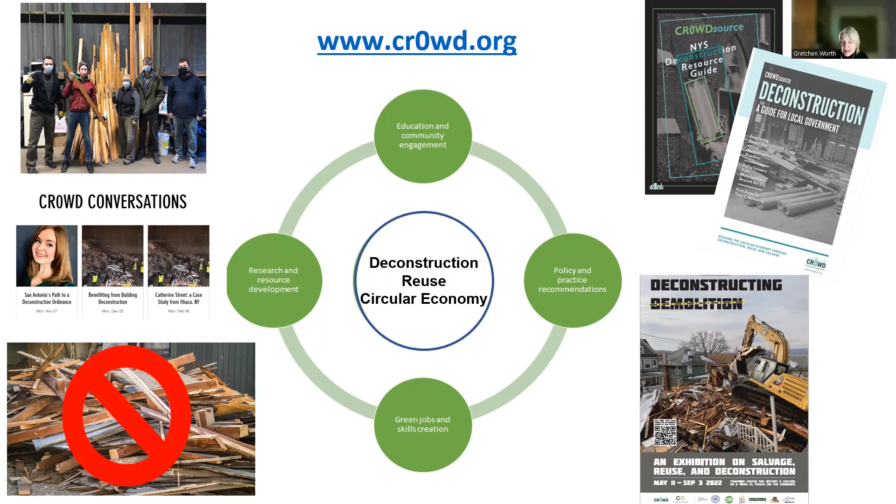Since we're coming to you tonight from Ithaca, New York, I'd like to acknowledge that Ithaca is on the traditional homelands of the Guyakahono, the Cayuga Nation. The Guyakahono are members of the Haudenosaunee Confederacy, an alliance of 6 sovereign nations with a historic and contemporary presence on the land. The Confederacy precedes the establishment of Ithaca, New York State, and the United States of America. We acknowledge the painful history of Guyakahono dispossession and honor the ongoing connection of Guyakahono people, past and present, to these lands and waters.

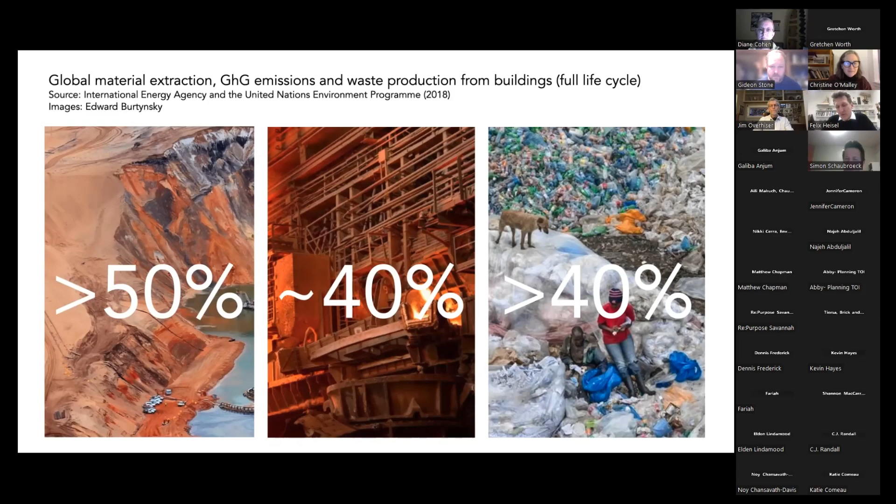If you look at the influence of building and construction over the whole life cycle of buildings, from the production all the way till the end of use, then our industry is responsible for more than 50% of resources that are taken out of the Earth's crust, roughly 40% of carbon dioxide emissions and more than 40% of solid waste that is being generated. And it's worth looking at especially the carbon emissions a little bit more in detail.

If we were to aim for the 1.5 degrees Celsius target that was agreed at the COP in Paris in 2015, I think, 2016, we would need to flip the curve that we've been running for the past 100 years, which is an exponential curve that goes up in terms of carbon emissions and had just started to slow down now. If we flip that and mirror it, then we have the target, which means a reduction in carbon emissions by 65% in the next, let's say, 7 years.

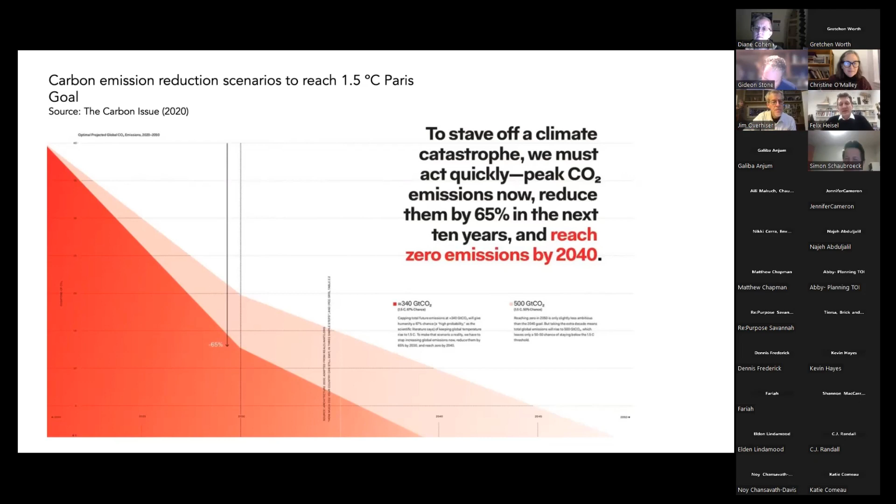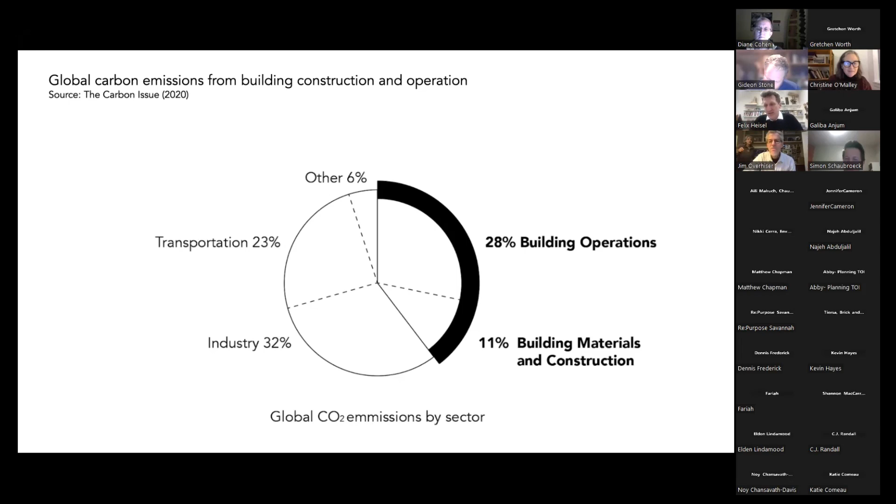6-7 years, which is an immense undertaking considering the size of our industry and the timelines associated with the construction of a building. So we really have our work cut out. But if you look at these numbers in more detail, part of it comes from the operation of buildings, all the energy to run a building, to heat a building, to run our computers, et cetera. And the other percentage, globally 11%, comes from the production of materials and the construction of these houses themselves.

But this isn't the whole story, because if we change the time scale and look at only the next 10 years, these numbers shift dramatically, because operational carbon emissions are emitted little by little, year after year, over the timeline of a whole building, which is 70 plus years, ideally 500. But if we only look at the next 7 years, the time it takes to reduce our emissions by 65%, then the embodied carbon emissions, which are emitted on day one of a building's opening, because they were produced in the production of that house, take on 74% or even more of that pie chart.

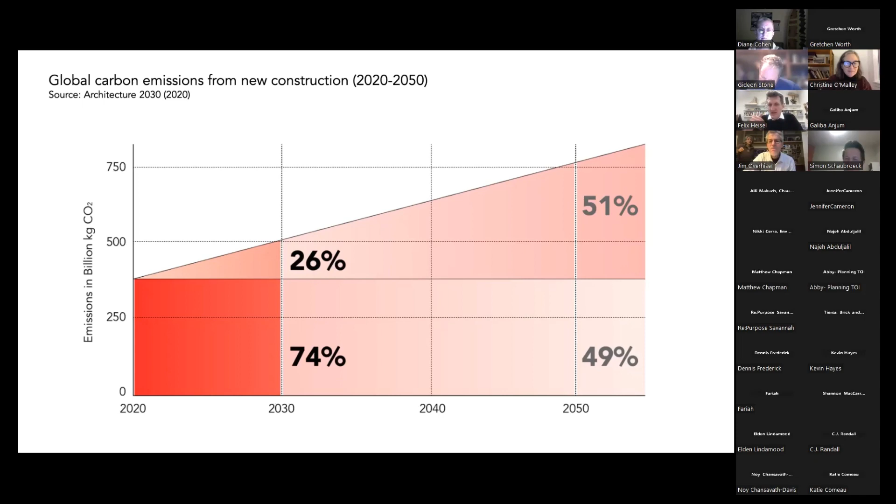And so if we want to make swift and rapid change, we need to change the way we build, and we need to change the way we source our materials, and reuse is the most sustainable way to do so.

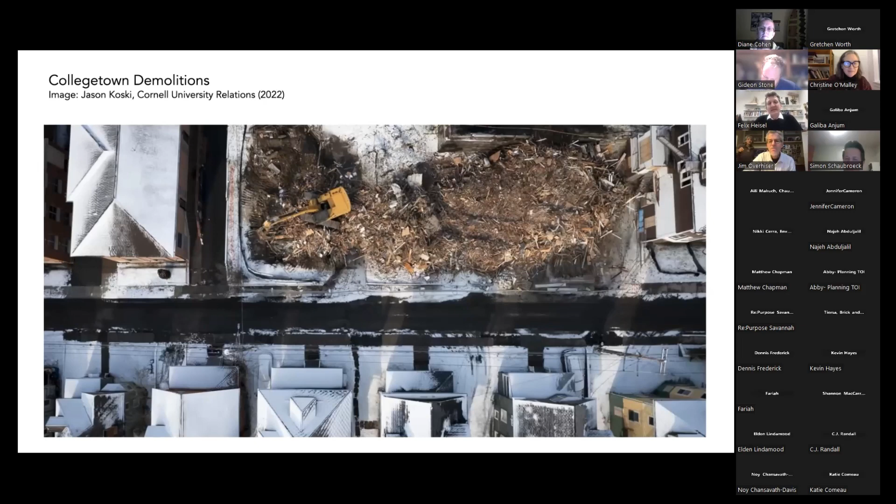And so within this framework, we looked locally at Ithaca, trying to understand the conditions and the capacity and kind of economic system of implementing something like this within the local system, utilizing this case study that Christine laid out already.

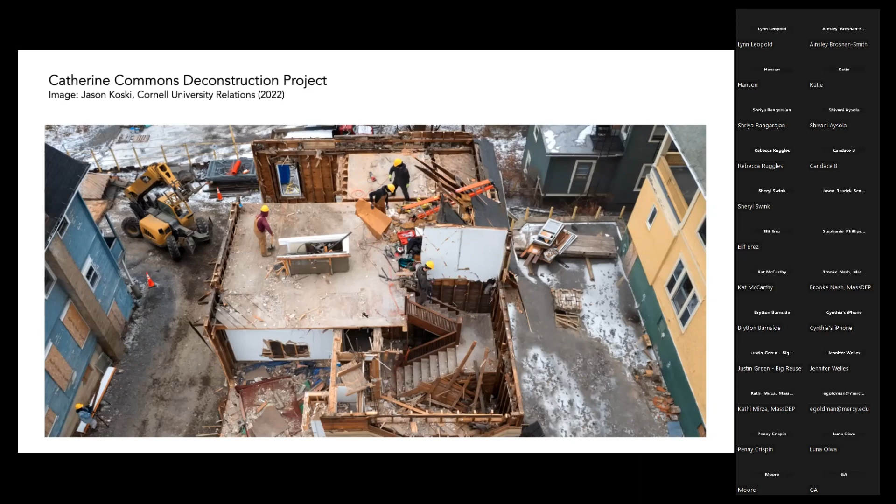And so what you see here right now is an aerial shot of these 11 buildings that were demolished in January of 2022. And we were able to deconstruct one of these 11 houses, but within a very strict setting: it cannot take longer than the demolition of the other 10 houses is taking. And so that meant we had roughly a week to deconstruct this building, which meant we needed to shift from a traditional technique of unbuilding the house element by element to what we call a panelized deconstruction.

And so essentially that meant we cut large pieces out of this house and then lifted them on a flatbed and brought these elements to a warehouse to then be processed offsite, which also has many advantages because you have a controlled environment that you're working in. You have better control of the materials and their material flows. And the developer has a clean site much quicker. We essentially were done after 5 days with a house of 4,500 square feet and 13 bedrooms.

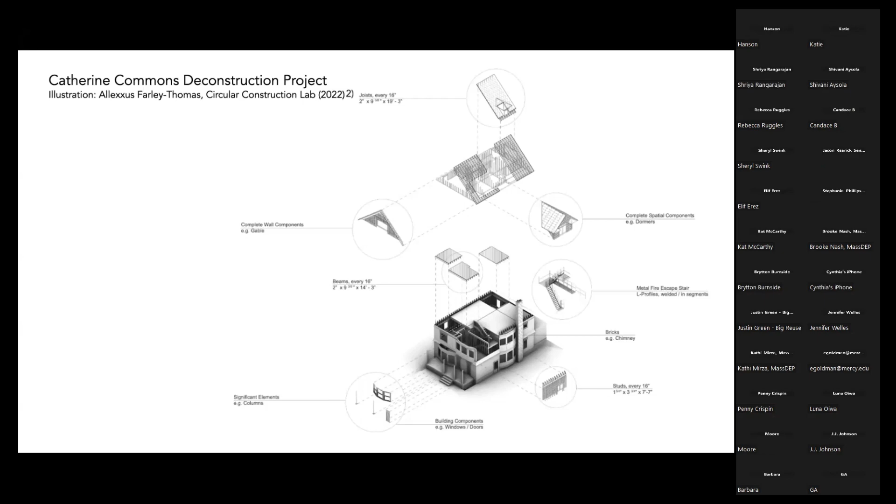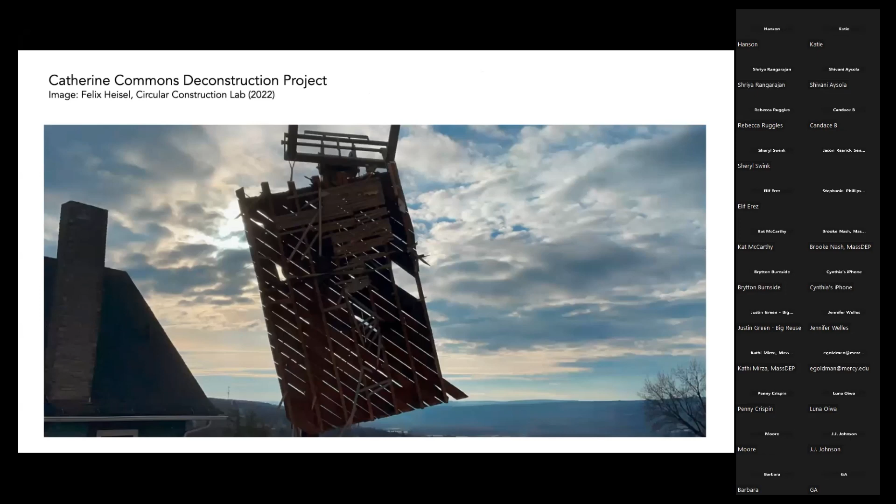And here you see a couple of impressions of how this looks. This is the gable being cut out and lifted down. This is the panel of the floor lifted off, and then this is at the end of day 5 the stack of material down at Finger Lakes Reuse's REDOT site. And with this stack of material, I want to hand it over as a kind of mediator and the revolving point of this conversation to Diane to talk about Finger Lakes Reuse.

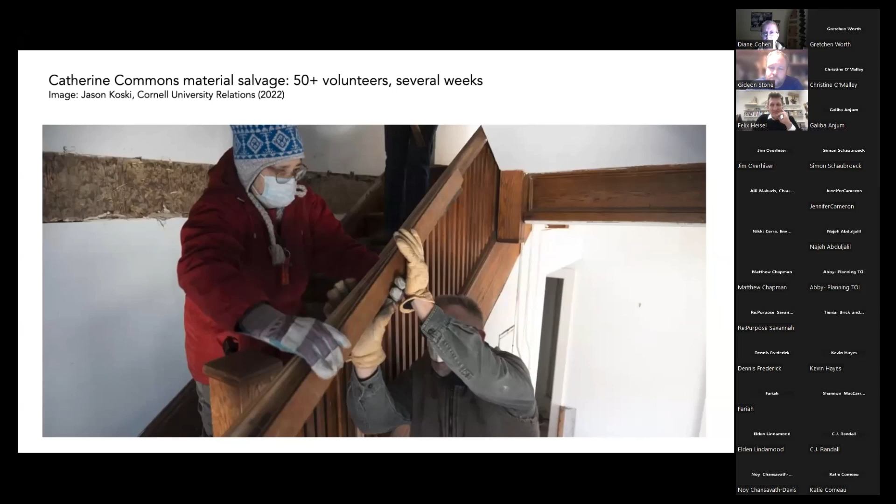We had more than 50 volunteers show up in pretty bitter cold weather, doing bucket brigades of flooring that had been pulled up to load it out. It was thousands and thousands of square feet of flooring out of these 10 houses. And the house that we deconstructed was all paid labor, just to keep the insurance satisfied and make sure that we had a clear distinction. So we had volunteers working in the salvage projects, and where the structural demolition was, that was all paid and insured workforce. Next slide.

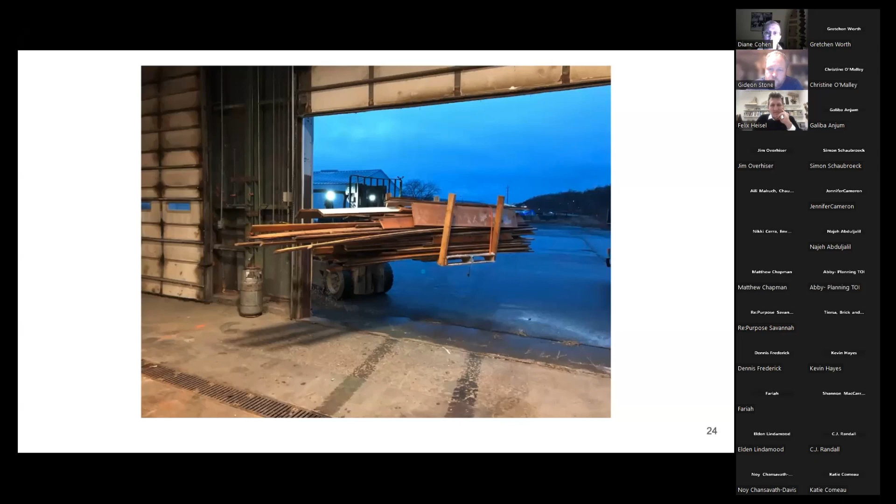So we scrambled to rent a warehouse, knowing this project was coming and a huge volume of really nice, beautiful, dry, valuable wood was coming. Here's the forklift bringing some of the material in. Go ahead. As soon as we got the warehouse, we had other space needs as well, so it was a shared space. All those pallets in the background are electronics, household items, clothing. About a third of the warehouse we dedicated to these building materials coming from Collegetown. Next slide. Here's a bunch of the materials in there.

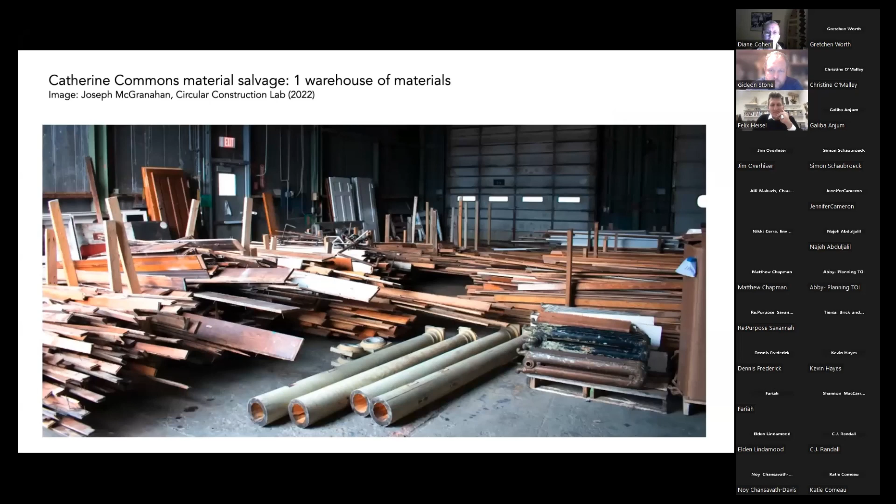Next slide. I think that was September, we had everything in that warehouse plus another 130-plus pallets of material under tarps outside. Just so much material was coming at us last year. Each year it's more and more. And we always try to figure out how to manage this volume of quality materials.

Next slide. So we really didn't have the workforce to pay to process these materials. So we've used all volunteer labor, denailing these thousands of square feet of flooring, using the space to do so. Next slide. Community members, college students. Next slide.

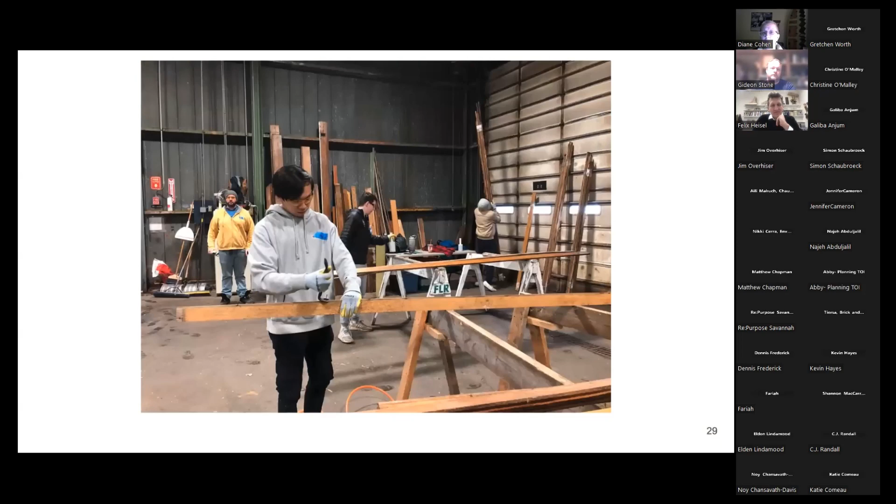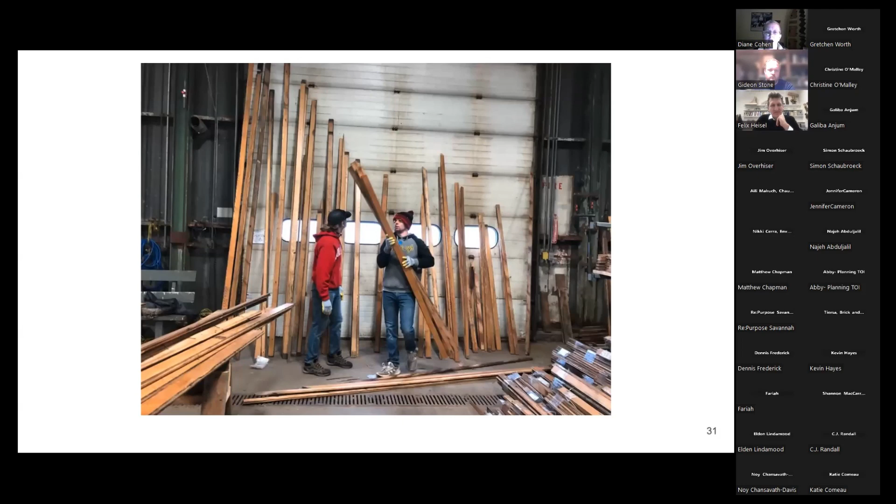And I know Historic Ithaca was salvaging quite a bit as well out of the houses. So we haven't gotten the data on that yet, but it was a great community project and an exciting way to engage people. And thanks, that's it for me.

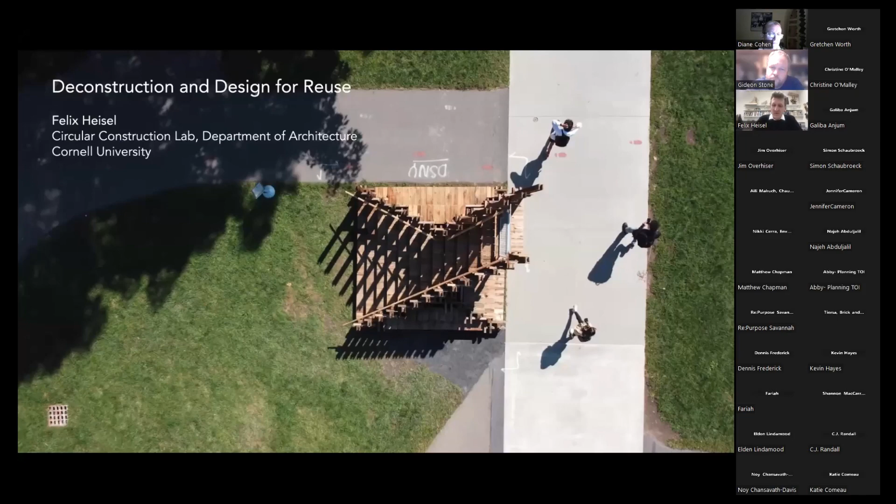Great, thank you, Diane. I'll jump in and talk a little bit about the Circular Construction Lab and our interest in this project and the learnings from that project moving forward. And so just a couple of words about the Circular Construction Lab. We're a research unit at Cornell University that really focuses on the implementation of the circular economy into the built environment, into an industrialized construction industry. And our focus goes two ways.

On the one hand, we're looking at all the buildings that have been built already and trying to understand how we can activate those as a resource for future construction, which is what we're talking about today. But equally important for us is the question, how can we build differently from now on, so that the houses we're constructing right now are designed for disassembly and take all the lessons learned from the struggles that we have at the moment into consideration, so that the buildings we build now will not turn into a toxic dump landfill in 50 years or 100 years or hopefully 500 years down the road when they reach the end of their service time.

And it's a big effort of many people, and I'm just the one representing, and I'm glad enough to speak about it. But I want to shout out to my students that have been a phenomenal part of this research.

And so the interest that the Circular Construction Lab has in these projects goes in many different directions. On the one hand, we're trying to figure out a technology that answers the question, what is a building made out of, if we have no idea what it is made out of? Because a building that was built in 1900 or 1906 usually doesn't have documentation that is more than a thick black line if we have archive drawings, but we do not know the detail, what is actually the material in the wall behind that plaster board.

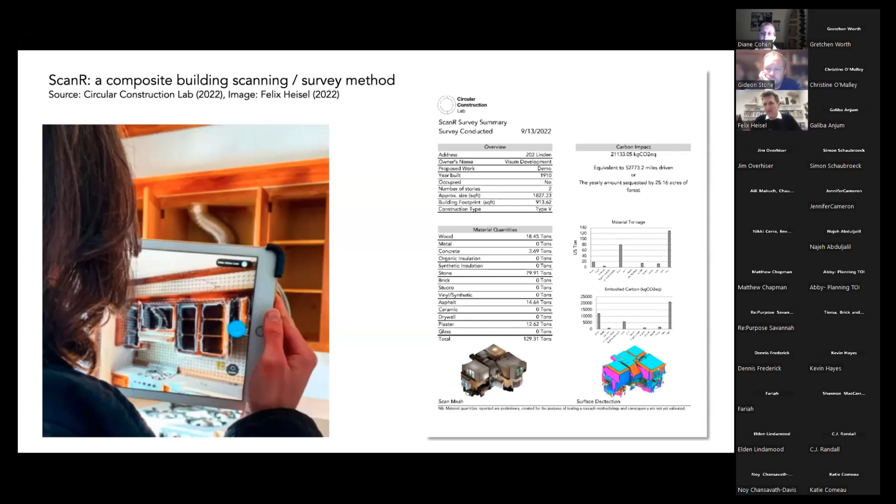And so what we're developing here is a kind of scanning software that gives us very quick estimates of the content of a building based on material family, based on embodied carbon values, once you walk through the building. It essentially activates a technology called LiDAR, which is now available to most of us with the phones in our pockets, so the technology readiness level is quite high, and the technical and financial limitations of using a software like that are limited. And so we see a big chance of bringing the understanding of the material content into this conversation as a starting point.

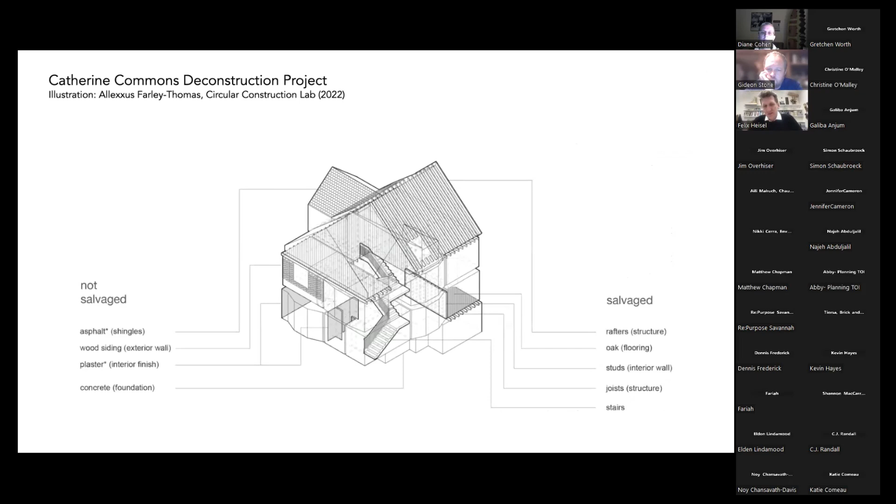The second point that we're interested in in this research project is understanding what is salvageable. And so in the example that we've just looked at, everything on the right side was salvaged through this deconstruction effort. But there are several other material families that we didn't touch or that we couldn't touch due to regulations.

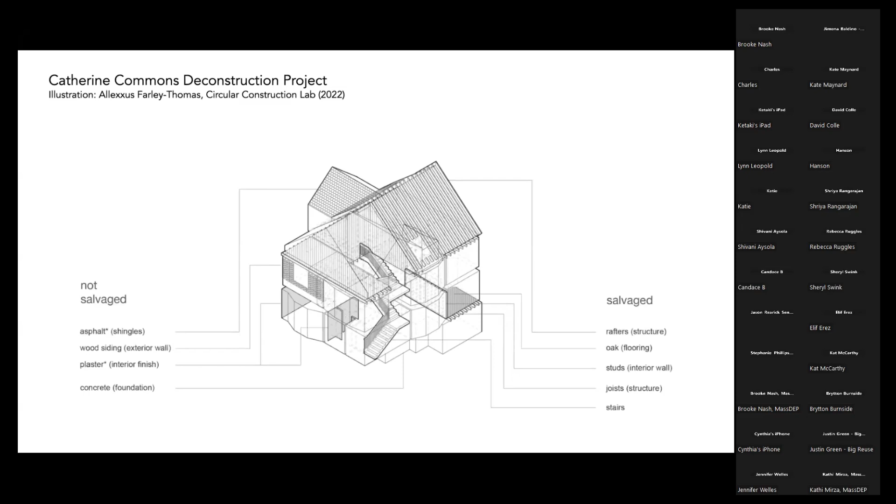For example, the asphalt shingles in New York State, you're not allowed to recycle those. This is something that might have looked different in a different state or a different context. We also weren't able to recycle or reuse any of the concrete due to the setting of that specific project, which is also something that really needs to be investigated much more deeply. And there are first ideas of how reuse with concrete could look like.

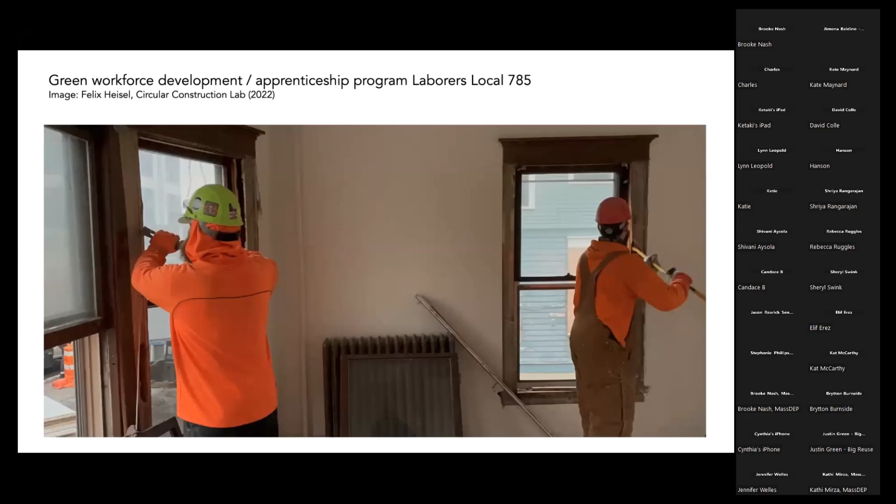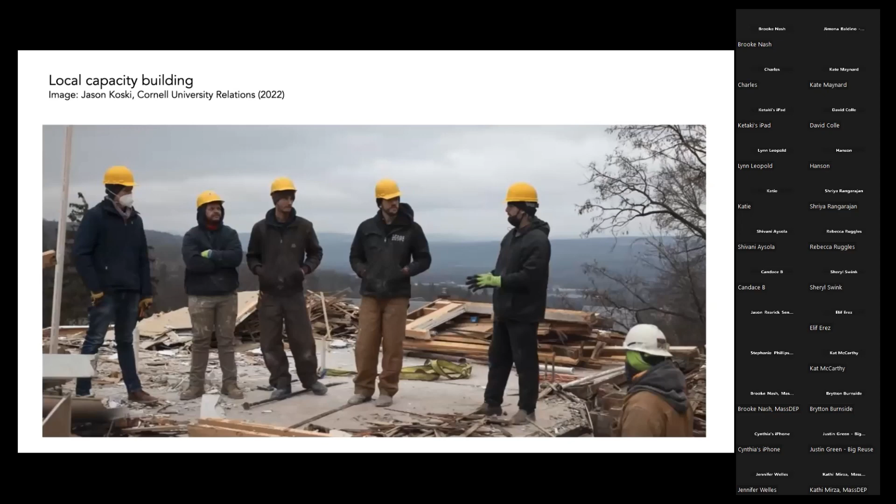Then, of course, we're interested in the market value, but this is really sort of Diane's field. We're increasingly interested in what workforce development looks like, how we can develop trainings, how we can collect the knowledge that comes out of these projects into information that can be passed on, that can be communicated, and how would that work as an educational facility? That is one of our interests, and it is something that we're doing within the community, within skill training, but more importantly also with our students.

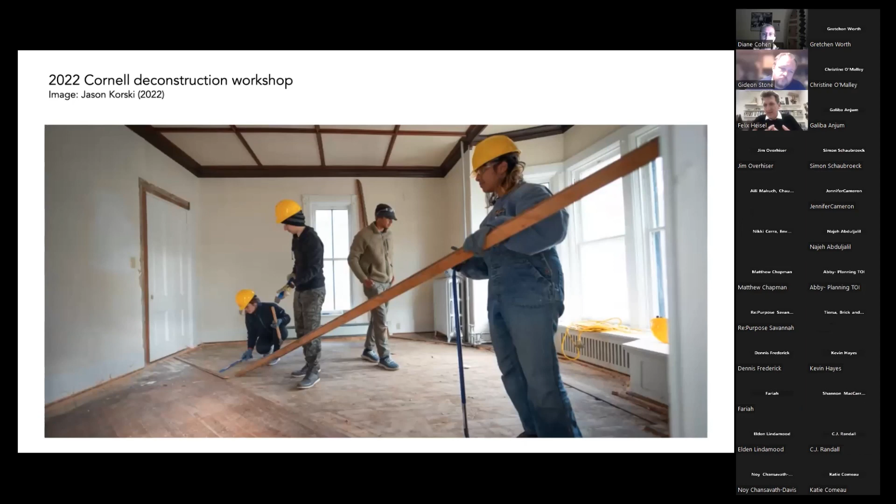So these are examples from a deconstruction workshop that we just conducted in September of last year, a different building where students really had a chance firsthand, hands-on, to experience salvage and deconstruction, pull nails, de-nail flooring, understand the complexity and difficulty that this process brings to the table.

But I think there's a more important learning curve in this, because if you've tried to take apart something that wasn't meant to be taken apart, and you've tried really hard and put in all your labor and force, you're not going to go back to the drawing table and draw something that doesn't work to deconstruct, right? And so by learning this the hard way, I think there is an interesting design lesson to be taken away from that as well. And so we're really interested in these kind of hands-on workshops.

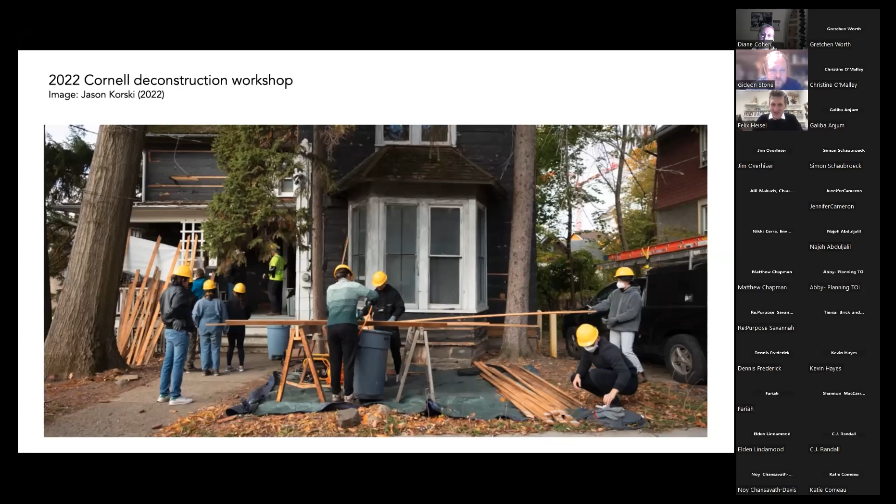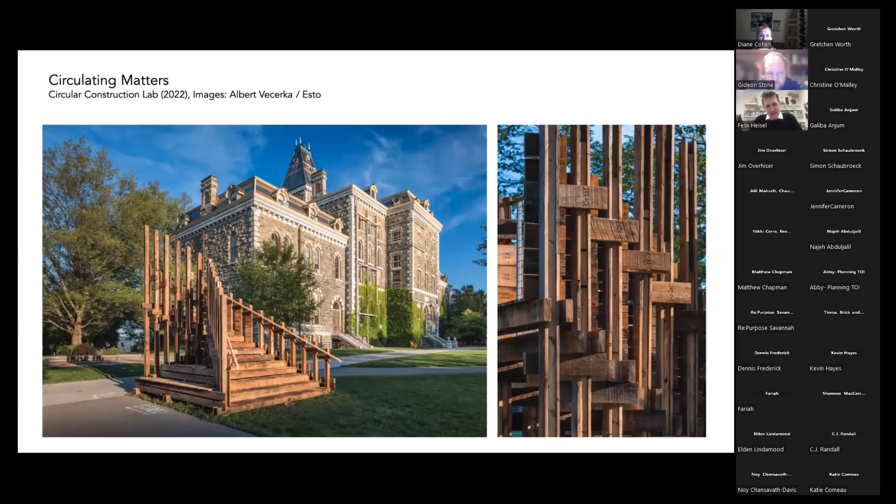And then the last component of this is to implement the materials that we salvaged into a design project. This is a little installation that is currently still standing on the Arts Quad at Cornell University, which is made entirely of timber that was salvaged from this case study project.

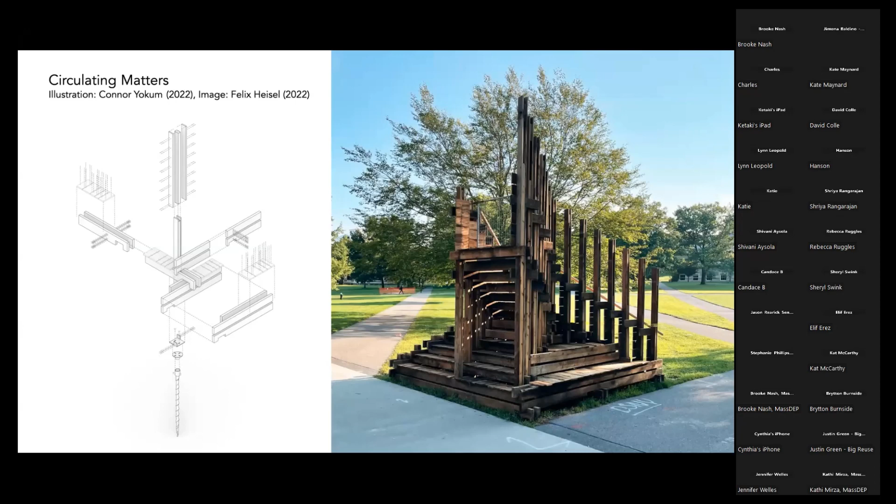And our interest in that was, on the one side, of course, understand the resource, quantify the resource, also specify the wood, the strength of the wood, do an engineering study on how to build something that is structural and something that needs a building permit from salvaged timber, but then also how to design something that is working with a non-standardized resource, because none of these timber beams have the same dimensions, for example. And so how does that change the process of reassembling a structure like that?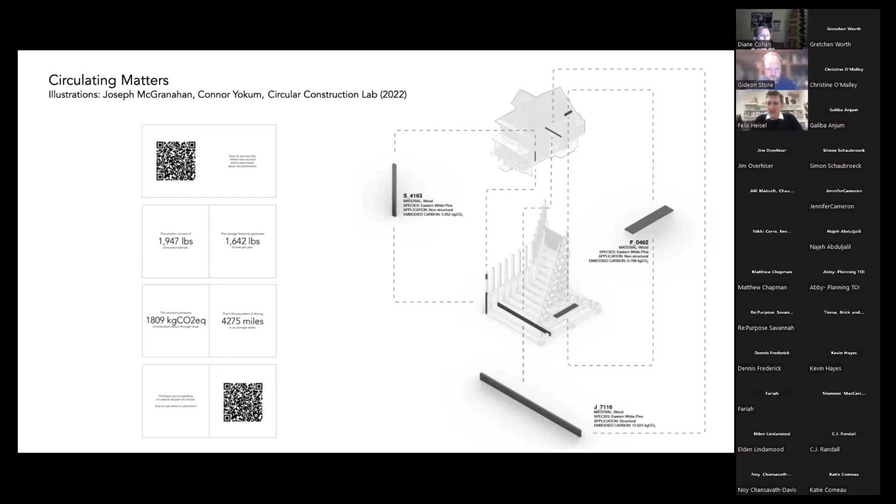And of course, that also involves documentation. So how do we build material passports? How do we attach these material passports? How do we tag the physical and the digital? And how do we keep track of these resources so that we can then reuse them in yet another application down the road?

And I'm extremely proud to be showing you this slide, because we finally last week published Rhino Circular, which is a software tool for Rhino and Grasshopper, which allows direct feedback on design decisions regarding the circularity of a design. And it's free for download now at Food4Rhino. And I'm really interested in what you guys are going to do with that, and to listen to your feedback.

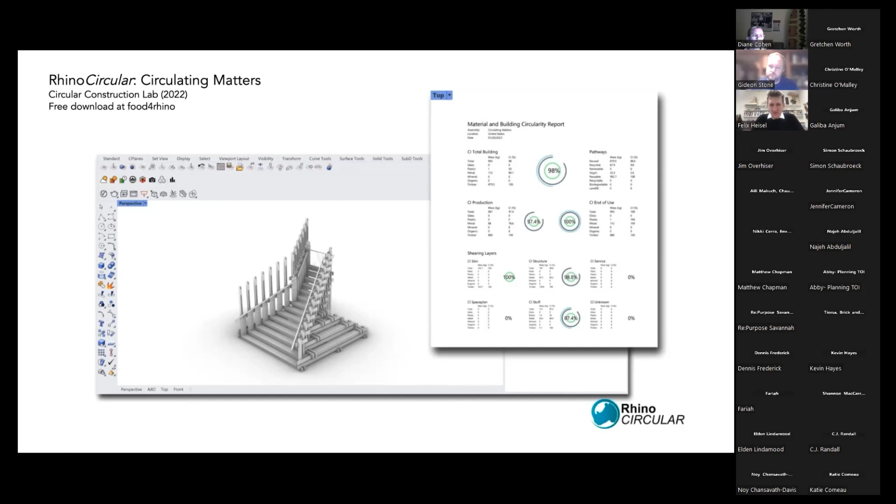And with that, I'm going to turn it over to Gideon Stone. All right. Thanks, Felix. Gretchen, Christine, thanks for having us. And again, thanks to the crowd.

It's really exciting to have an opportunity to be involved in a project like this from the standpoint of being involved in the design and build industry. I studied architecture up at Cornell and was on a project group there for the Solar Decathlon. And one of the biggest complaints that we as students had during that whole process was that we had tradesmen and folks in the community that we could probably learn a lot from, but there wasn't an opportunity to engage with those people that were out in the world doing design and building work on the daily.

So now that I've gone out into my professional career and have started my company here in Ithaca, to have this kind of an opportunity to work with a nonprofit and a research group from Cornell collaboratively on something like this, it was a really exciting opportunity for us as a company to dip a toe into really wrapping our heads around something that I think traditionally has not been part of the conversation in the work that we do as a design build firm.

Large in part because there's not a lot of money available for taking the time and the energy to be able to slowly deconstruct buildings and figure out how to utilize the materials that are embedded in these older projects and these older houses and structures, both residential and commercial.

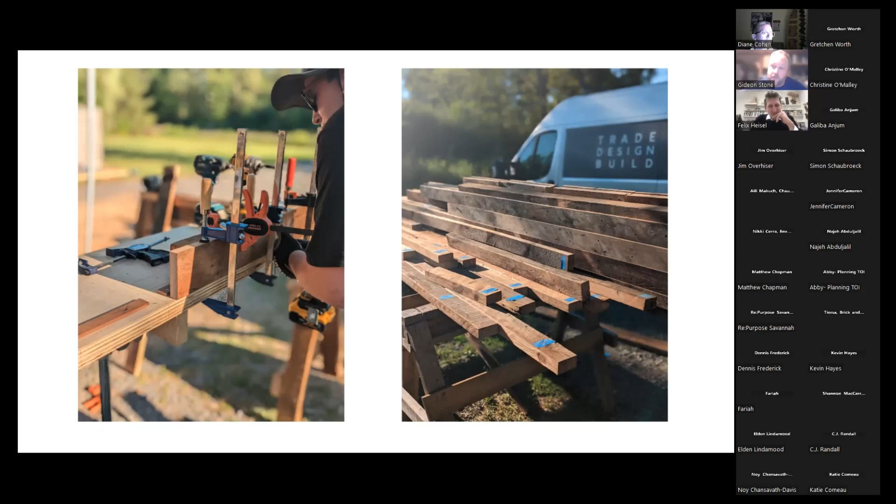So we contracted with Felix to do a little bit of the assembly work with the boards and some of the material we pulled out of the house on Catherine Street. And these are just some of the shots of us kind of going through. We cut all the components to length, labeled everything, and then we set up this whole process for assembling some of these components that were then given back to the student group, and they did the final assembly on the Arts Quad. So Felix, you can go to the next one.

And then, one of the other concepts that we're looking at that's really interesting is this idea of being able to take this panelization process of deconstruction, and limit the amount of effort that needs to go into taking the actual independent components apart and be able to just panelize the structure itself and see if there's a way that we can reuse some of these panels.

But Felix, if you go to the next slide for me, the idea of being able to take some of those panels and do some small structures like this, or even a single bedroom residence or something like that, is just one example of the many opportunities that we've got to be able to move this whole market and this process forward in a practical way.

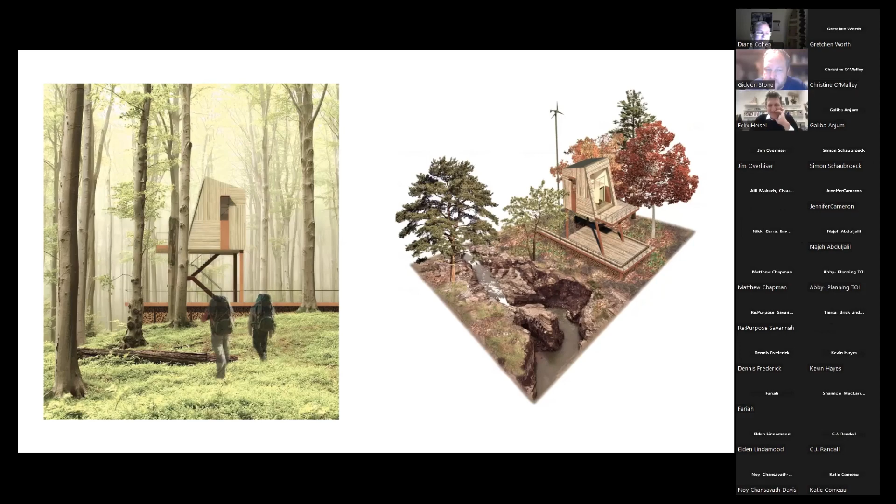turn things into building materials that are going to hopefully enable us to help embed some more carbon and just tap into reusing materials and waste in a way that's hopefully going to turn into a much more equitable and practical way to move forward, as opposed to just taking our old buildings and putting them in the trash. So I think that's the last slide I've got, and I'm going to pass it back over to Felix.

And I think this is sort of the underlying denominator for all of these projects: trying to figure out how can we scale this question in construction, in deconstruction, in design, in architecture and engineering. And I think that's also the question that we can bring forward in conversations like the Crowd conversations. And with that, we would be very interested in your questions, feedback and comments, and open the floor, and I pass it back to Christine.

Great, thank you so much. Lots of interesting questions coming in. I think one up at the top was about age requirements and about the whole certification process, or what's needed for deconstruction and how to go about it. So I'm wondering if you could just speak about that and about the training. I know you mentioned the workforce development piece of it, but also about deconstruction in terms of the actual certifications required for it.